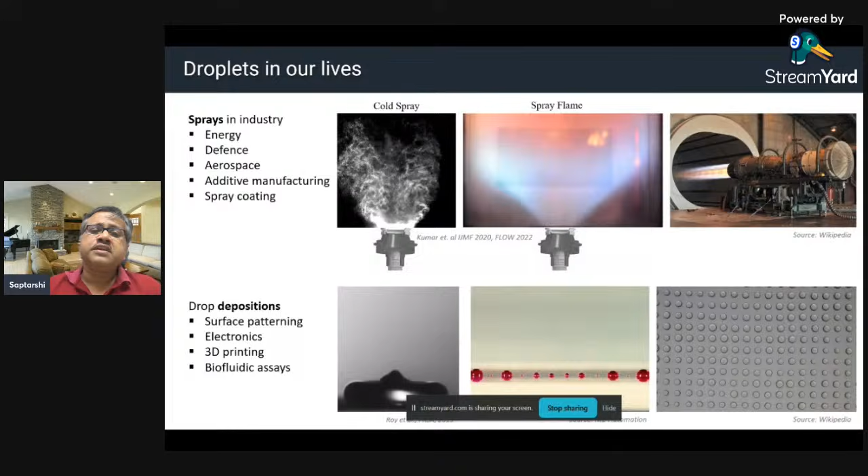But how about if you build those structures using a droplet-based framework? Surface depositions, 3D printing, biofluidic assays - these are all part of droplet depositions. And these happen at very small length scales, time scales, and small velocities also. So the top row basically designates sprays and droplets at extremely high velocities, whereas the lower part shows droplets where the flow is much more sedate. But both involve basically droplets. The physics does not change that much.

Moving on, you also have droplets in the framework which we call microfluidics. This is called droplet-based microfluidics. It has been there, and it is used regularly for point-of-care diagnostics. So microfluidics is a big area of research, and it is advancing every day.

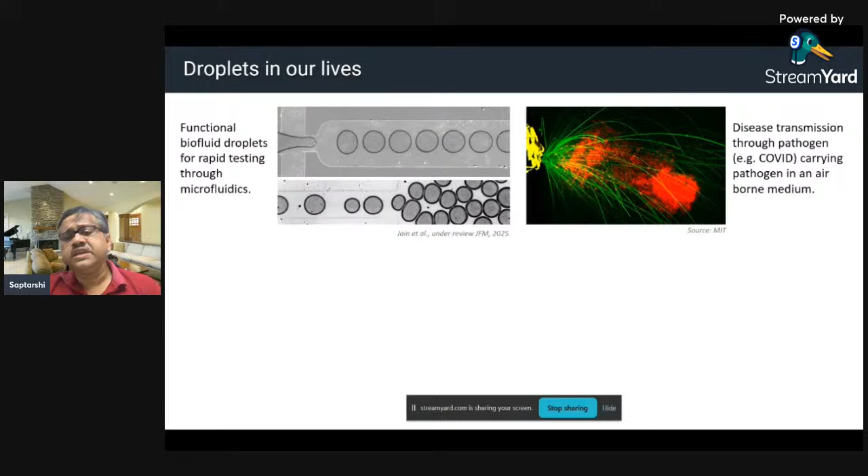So what you see on the right-hand side is an application of droplets which we have all encountered a couple of years ago during the COVID era, where disease transmission happened through droplets. When you coughed, sneezed, or talked, you generated droplets, and these droplets traveled in the air and infected persons located far away from you. So this is disease transmission. One example is COVID, but it can be any other disease transmission as well. Anything that is respiratory can actually happen in this particular fashion.

Then moving on, you also have droplets in agriculture, what we call precision agriculture these days. They also involve transport of droplets, basically droplets which can carry pesticides or nutrients. Droplets are transported by sprays or by vortex rings to transfer them to targeted plants. So droplets are there everywhere, and it's not just in one particular application domain, it's spread across multiple application domains.

All right, so now a little bit technical. Fluid dynamics is all about identification of the scales of the problem. Fluid dynamics is basically Newton's law. So it all depends on what are the velocity scales and the time scales of the problem. So there comes the interesting part. What you can see over here, the velocity scale increases from left to right.

At very low velocity scales and very low length scales, you have flows in microchannels. You have droplets which dry on surfaces. For example, the one on top, you can see bacterial flow in a microchannel, and the one at the bottom, you see a drying droplet of blood. These are at very low velocities of the order of microns per second, and the length scales are usually anywhere between 1 or 2 microns all the way up to hundreds of microns.

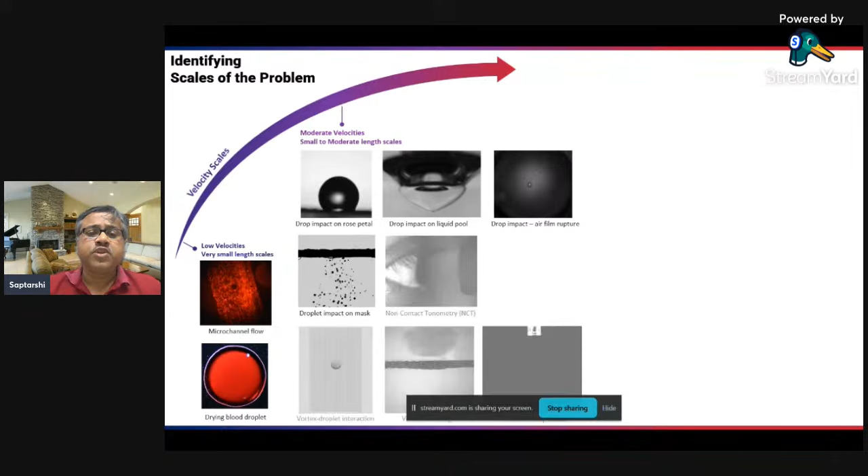In the middle, now if you go to moderate velocities and small to moderate length scales, you have droplets which impinge on surfaces - droplet impact scenarios, droplet impact on masks and wire meshes, droplets which come out of your eye, droplet vortex interaction, your soap bubble problem, and all these phenomena. These happen at moderate velocities and still small to moderate length scales. So these are right there in the middle.

And if you want to ask where droplet impact scenarios are used, you can readily see, for example, the windshield of your car. It is usually made out of a hydrophobic coating so that the droplet impinges on it and basically rolls off. But there are other applications where you actually might need the droplet to stick onto the surface. So surface engineering, surface chemistry, and droplet impingement play a significant role in all those applications.

The one that you see in the middle, where there is a human eye, this is what we call glaucoma testing. Many of us have done this, especially people who grow a little old and tend to develop increased eye pressure because of a condition called glaucoma. So what they do is use a vortex gun to shoot a vortex ring onto your eye and therefore measure the pressure in that particular way. In that process, you also generate droplets because of your tear film in the eye. So there are many applications and ways in which this kind of thing happens.

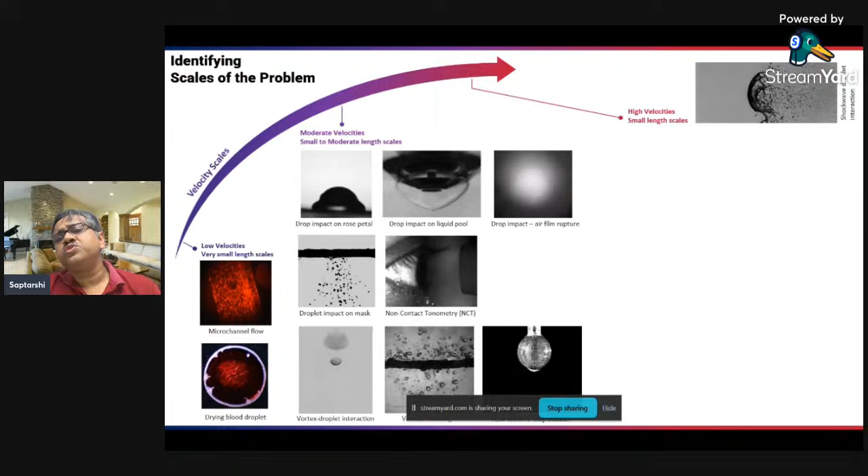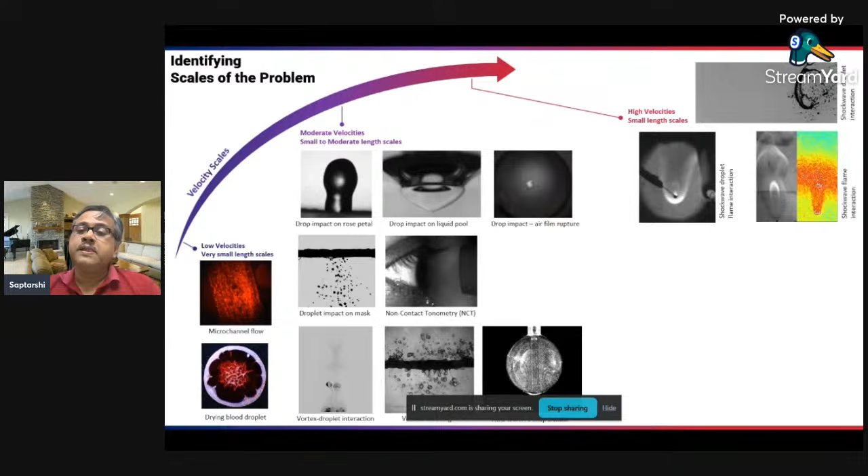Then you have droplets at high velocity scales. These are of Mach 3, which is typically close to 1,000 meters per second. But the droplets are extremely small, and we are going to talk a little bit about this in the later slides. So this is called high velocity, small length scales, usually called droplets under extreme conditions. For example, this is a droplet which encounters a shock wave. Then you have corresponding interactions happening in hypersonics, for example, where the flow is typically close to Mach 5, and therefore you have to understand how combustion of droplets takes place in those kinds of situations.

And lastly, there are high velocities and large length scale problems. This is typically what we encounter in gas turbines and other applications. The typical length scale for a gas turbine is of the order of 1 meter. In this slide, I showed velocity scales which vary from microns per second all the way up to thousands of meters per second, and length scales which vary from tens of microns all the way up to a meter. So you can understand the scale change that happens in these kinds of problems.

This is what makes analysis particularly difficult because of the scales of the problem. Fluid mechanics is all about scales of the problem and how these scales interact with each other. So I have divided my research all the way from small scale to large scale, from fundamental research all the way up to applied research. This slide tells you the different aspects of research. Anything dealing with multi-phase systems, interfacial sciences, we actually try to analyze those problems.

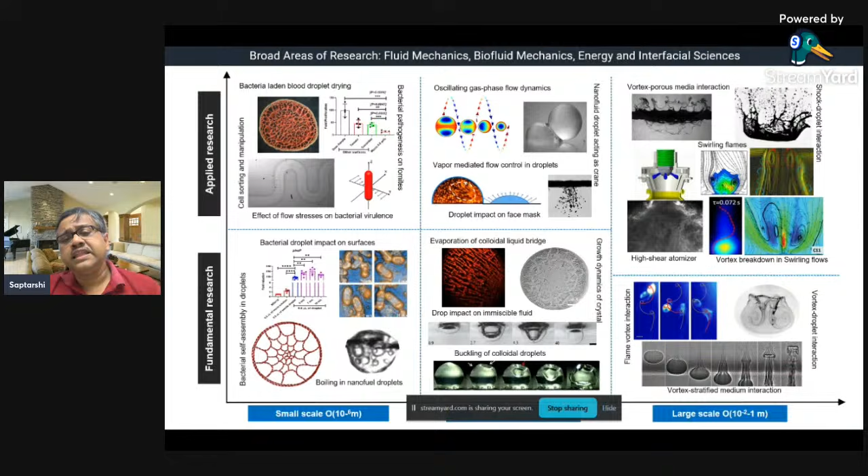So there are certain very interesting problems, some of which you will see in the next few slides. I'm a fan of Tintin, so what I can tell in this particular slide is that this is like the adventure of a droplet. So if I'm a droplet, what happens to me is my journey. I can deform, I can evaporate because I'm a liquid droplet, so I'm supposed to evaporate.

I can impact a surface. I can atomize, that means I can break up into smaller pieces. And in some cases, for reacting systems, I can also combust. So these are my different fates, my different destinations. It depends on the applications, but all applications will have one or more of these outcomes. So this is the journey of the droplet. My students tell me that we actually torture droplets, but since they cannot speak, we get away with it. So this is the adventures of a droplet.

And first we start with droplets in disease transmission. We look at a couple of specific areas which may be interesting to the audience, given that it is a broad audience. So disease transmission is something I'm going to discuss. There is a little bit of math and a little bit of experiments involved in this. More details can be found in the papers, which I'm pleased to share if anybody is interested.

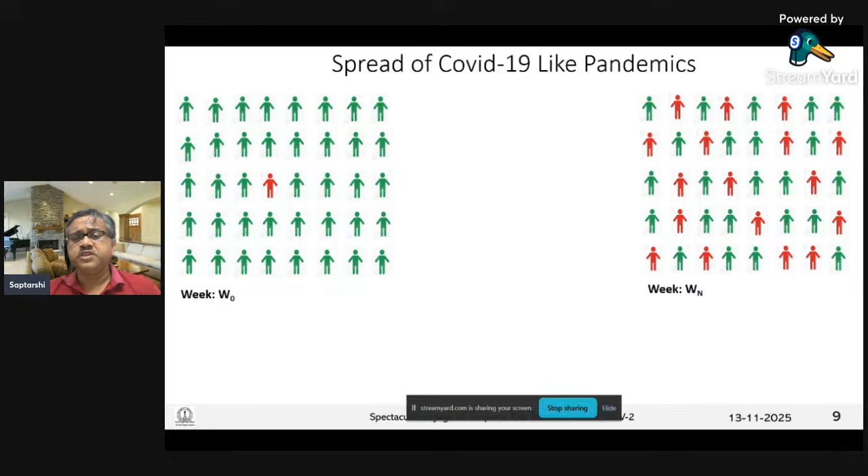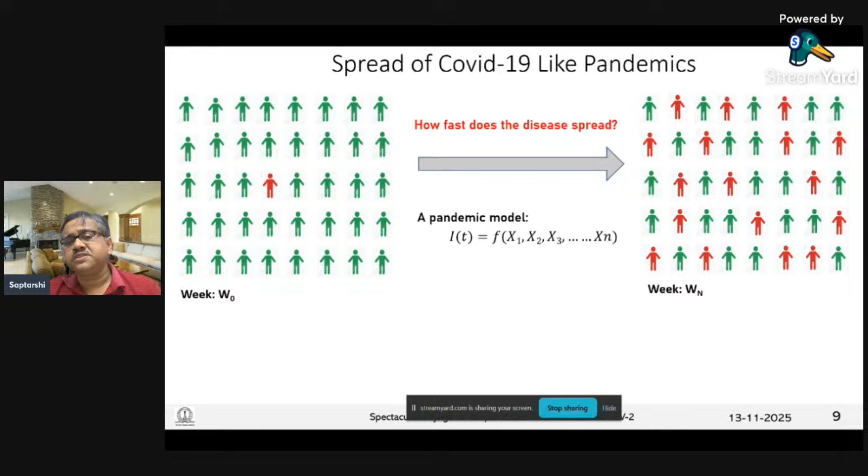So the question that all pandemic modelers and other people actually asked is how fast does the disease spread? This is a fundamental question, because that will enable us to decide how many hospital beds we need, what is the oxygen requirement, what kind of lockdown we should have, social distancing, and many other things. The idea is that any pandemic model basically tries to predict the rate of infection, and that typically should be a function of multiple parameters, x1, x2, x3, all the way up to xn. So typically pandemic models are complex, as you can understand, and they have a large uncertainty. That's why we did not predict COVID-19 that well.

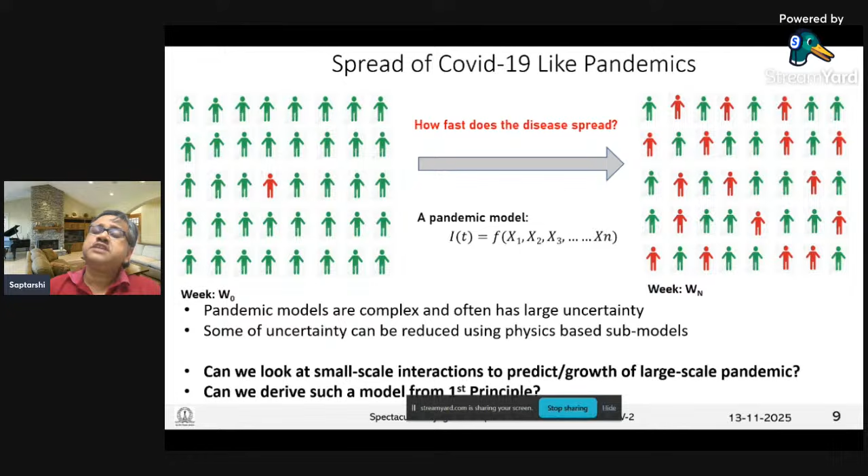Some of this uncertainty, we felt, can be reduced if we used certain physics-based submodels, so that not everything is based on curve fits. That led to the journey. We thought, can we look at small-scale interactions, the droplet-level physics, to predict the large-scale pandemic? There's a small scale where droplets are on the order of microns, and we want to predict a macro-scale event like a pandemic. Can we derive such a model from first principles and reduce the uncertainty as much as we can? This is more like a framework development.

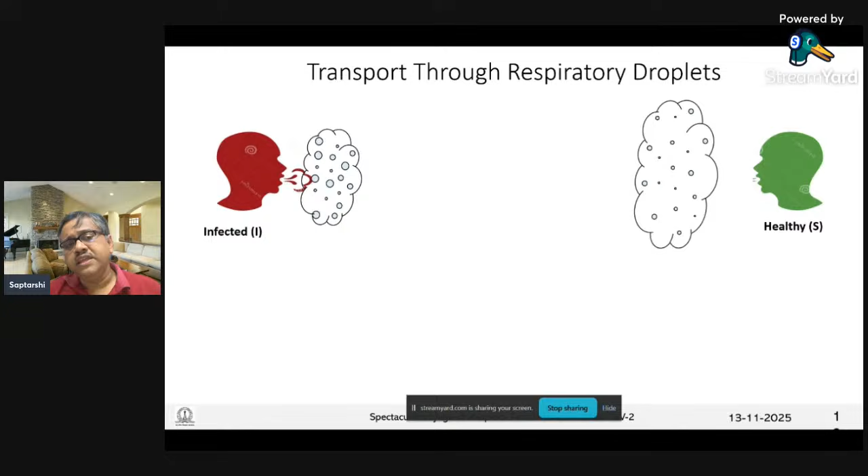So how does the transport happen? An infected person sneezes, coughs, talks, sings, whatever he does. He releases a cloud infested with droplets of various sizes. This cloud expands, because any cloud will expand, and a healthy person inhales this and becomes infected. This is the standard methodology.

When respiratory events eject these droplet clouds, it is influenced by various conditions. For example, if you wear a face mask, this cloud will be different. These clouds are then transported and at the same time dissipated, because fluid mechanics systems are highly dissipative in nature, so they are influenced by your ejection condition. Your cough cloud will be different than your sneeze cloud. It is also influenced by the ambient flow field where you are situated.

These droplets do not remain intact. They evaporate, precipitate, since these droplets typically have salt, and they aerosolize. If they aerosolize, precipitate, and evaporate, they will be influenced by ambient conditions like temperature and humidity. This matters a lot, because if you have a wet towel and want to dry it during the monsoon season, it will dry at a much slower rate compared to during summer or winter. So it depends a lot on temperature as well as relative humidity.

When a healthy subject inhales the droplet, it is not only the viral load he inhales, but also the biology of the virus, or in some cases other pathogens, and the immunity of the subject. Even though I might inhale a certain quantity of viral load, and somebody younger might inhale a similar quantity, the outcome may be very different. So it's a complex subject - it's not just transmission, it's how it affects the subject. It depends a lot on that.

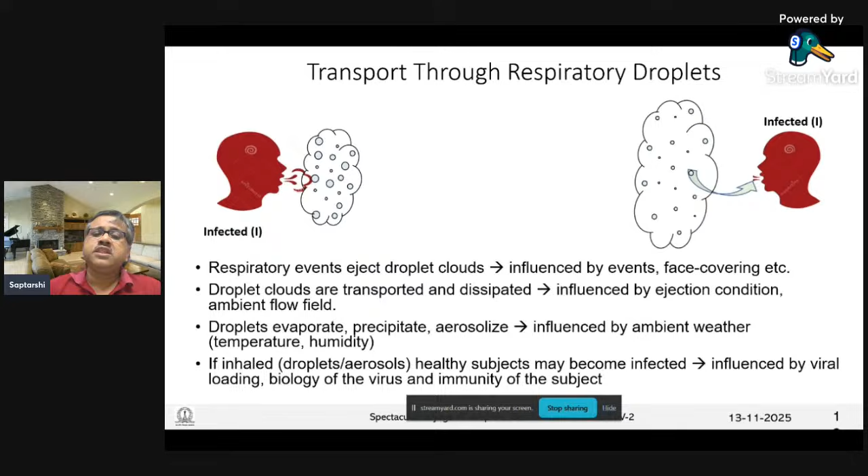The pandemic model - we'll come to this a little later. Coming from chemical engineering, mechanical engineering, and other backgrounds, you have a ready-made analogy: something like collision theory, as used regularly in combustion, where an infected person and a susceptible person give rise to two infected persons, and this reaction proceeds with a certain rate constant K. It's very similar to two molecules A and B colliding and forming a product AB. This forms the fundamental principle of the SIR model, and it can be derived from first principles.

If you look at a person P, he ejects a cloud of droplets. This cloud goes on increasing in size, and any healthy person, designated H, who comes into this domain of the cloud, within this ambit, will get infected. In other words, the rate constant at which the reaction proceeds, or the rate of infection, should be a function of the droplet physics. This is the basic tenet of what we are trying to do.

The droplet physics, in the case of pathogens, deals with respiratory droplets, which are essentially multi-component: they have mucus, water, salt, and the virus. They undergo evaporation, dispersion, and settling - the larger droplets will settle. Then there's evaporative cooling, because as droplets evaporate they can cool down. They also undergo crystallization, since they have salt. Their lifetime is a function of relative humidity and temperature. Now, these exhaled droplets suffer three fates.

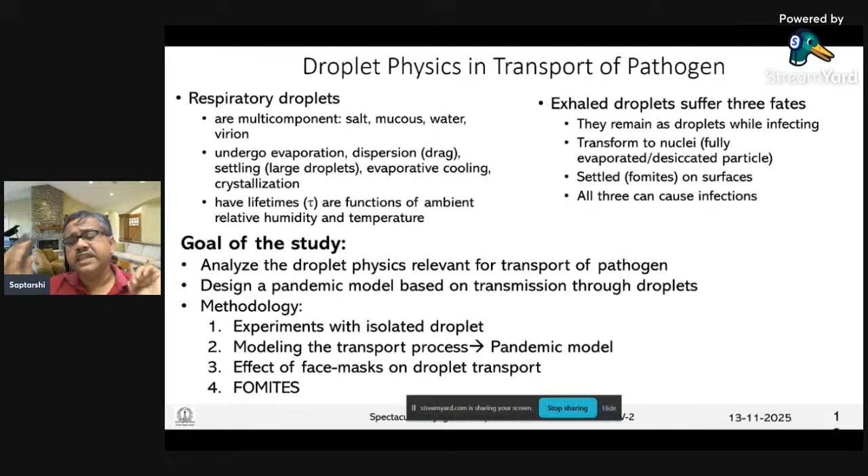So the goal of this study was to develop a methodology to do this. How do you do it? You first do some experiments with isolated droplets, then you model the transport process, and couple that model to a pandemic model. Then you look at other stuff like fomites, and what happens when you have face masks. We're going to take the first three. Fomites is a huge area of research where we've done significant work, but we'll cover that in a future session. So, experiments with isolated droplets - how do you do it?

The evaporation pattern is very important, as is the precipitation dynamics. So you basically simulate the respiratory fluid - typically you use 1% aqueous NaCl solution as a surrogate respiratory fluid. You also add nanoparticles, typically 100 nanometers in size, as a virus substitute. Otherwise you'd need a BSL-3 facility to carry out the research - that we have also done, but at a later stage. This is good enough to understand the physics of the problem.

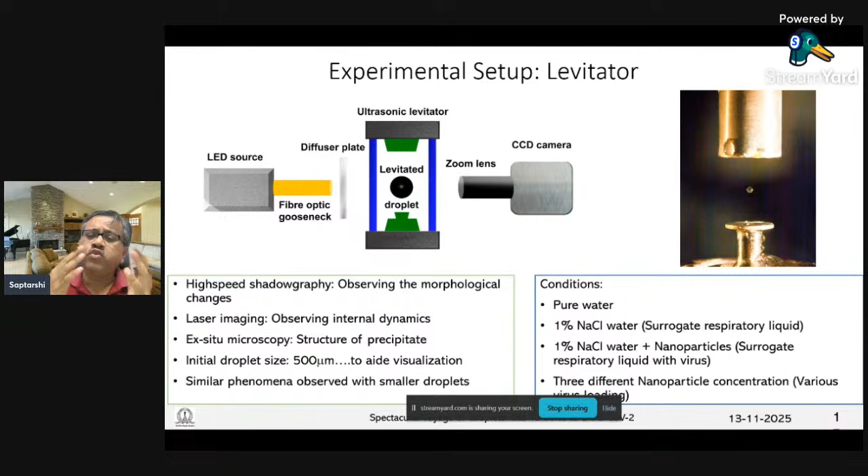So what we use is an acoustic levitator - a device where the droplet can be anchored in a contact-free environment using nothing but acoustic forces. We use high-speed shadowgraphy and laser imaging to see what's going on with the droplet size and the final precipitation morphology. We've done varieties of things: first a control case with pure water, then NaCl water, then NaCl water plus nanoparticles, just to see the effects of different components on the overall evaporation dynamics.

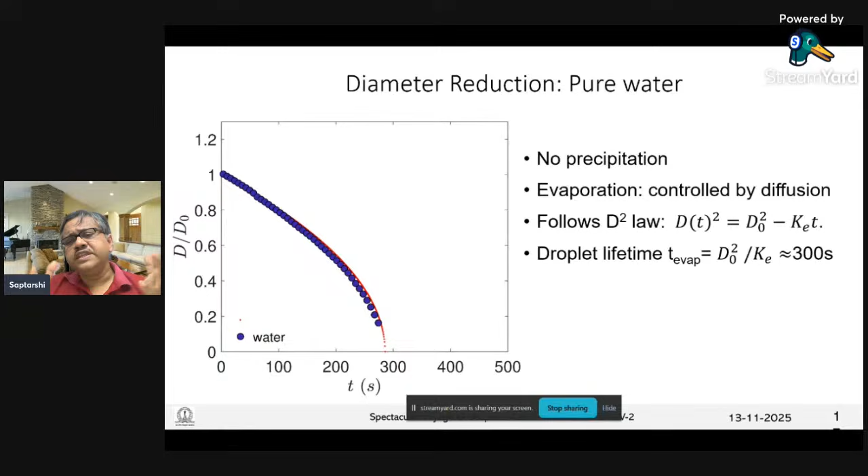If you do pure water, you get something like this - it follows what we call a d-squared law, which is a diffusion-dominated phenomena, and it roughly scales according to your droplet diameter. Then if you add salt water, the evaporation is a lot slower just because of the effect of the solute, governed by Raoult's law. As the salt concentration increases, the d by d-naught trajectory tends to develop a knee - the evaporation shallows down. It's a question of evaporation rate weakening.

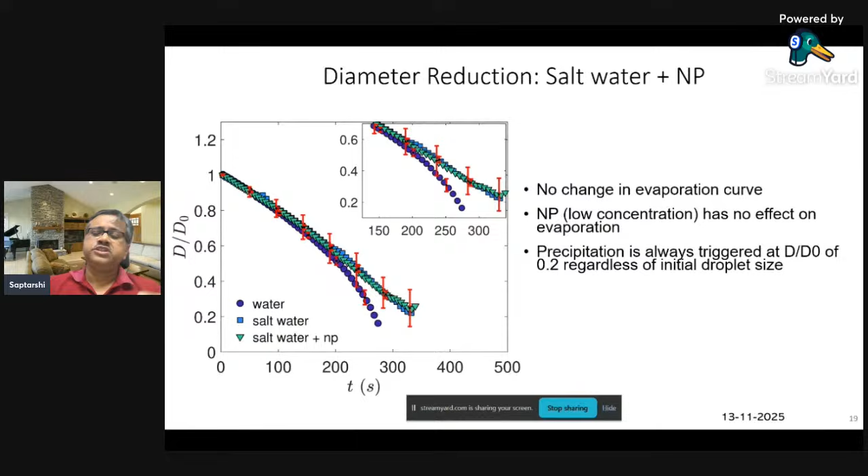But when you add nanoparticles for the kind of viral loadings we're dealing with, there's no change in the evaporation curve. The precipitation for the salt concentration we're dealing with triggers at around 0.2 of the initial droplet diameter - that's where you get the knee and the droplet doesn't shrink any further. This is at a typical temperature and relative humidity setting.

So this slide I will just skip.

So when you actually inhale an aerosol, you are basically inhaling a dose of this crystal, which is infested with these virions. But the virions are in a state of, basically, fossils.

But what happens when it goes into your mouth, it rehydrates itself and they come to life, if you consider the virus to be living in that way. So what we can say is that the presence of the salts affects the evaporation, and nanoparticles does not affect the evaporation, and the nanoparticles, aka the virus, distributes inside the crystals that form at the end of the evaporation process.

So these are the insights from the experiments. Now it sets the stage so that we can go for the modeling aspect of it. It has to be a physics-based model, validated by the experiments. It should capture the effect of the ambient conditions as well as the jets coming out of your mouth, but at the same time, it should be simple enough to use in large-scale pandemic models.

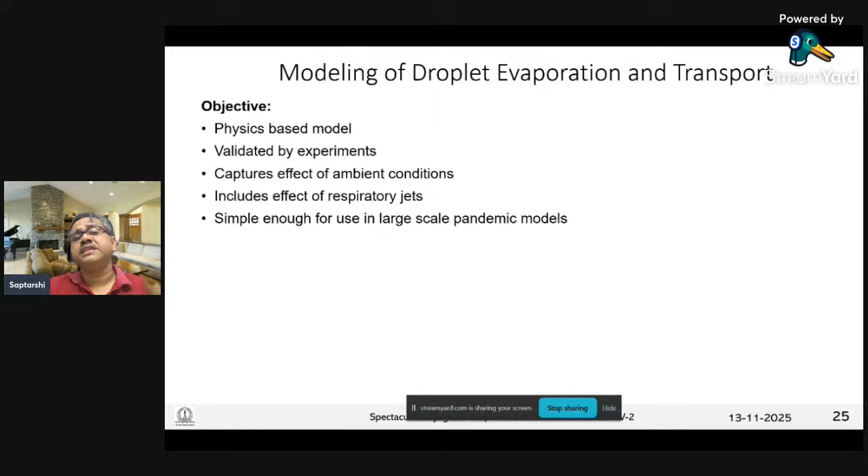We ourselves have done modeling of droplets, which are very complicated. You can solve for the entire field within the droplet, outside the droplet, etc. But to incorporate them in a large-scale pandemic model for a quick turnaround time is vitally important as well.

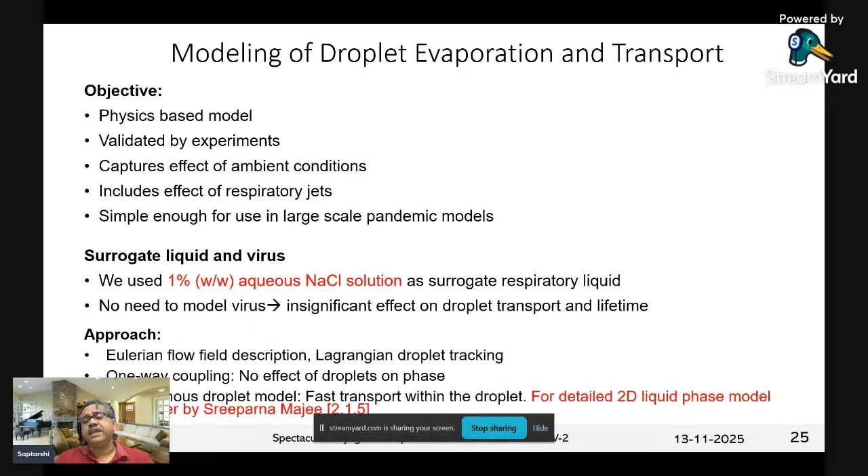So we capture the essential physics, but at the same time keep it light so it can run pretty quickly. We used the same NaCl solution. No need to model the virus because it doesn't have any effect on the transport and lifetime of the droplet. The approach is basically a Eulerian flow description with a Lagrangian droplet tracking, so one-way coupling. We have a homogeneous droplet model, as well as 2D models, 3D models, lots of things. I'm just going to show you the very basic model here.

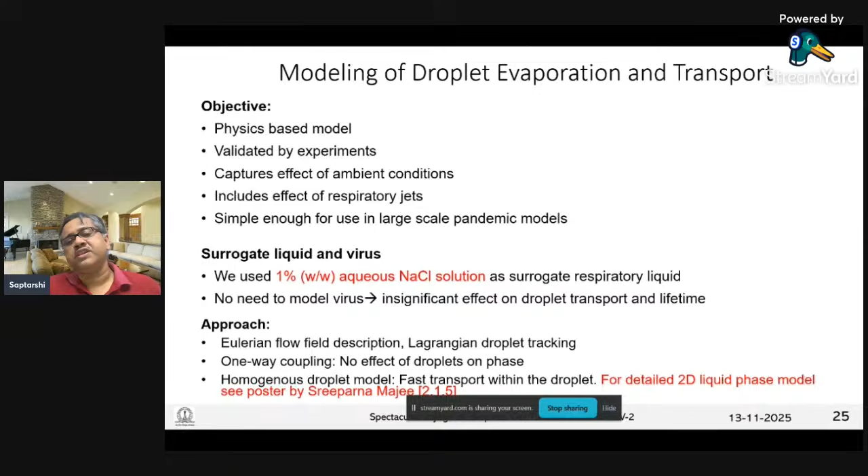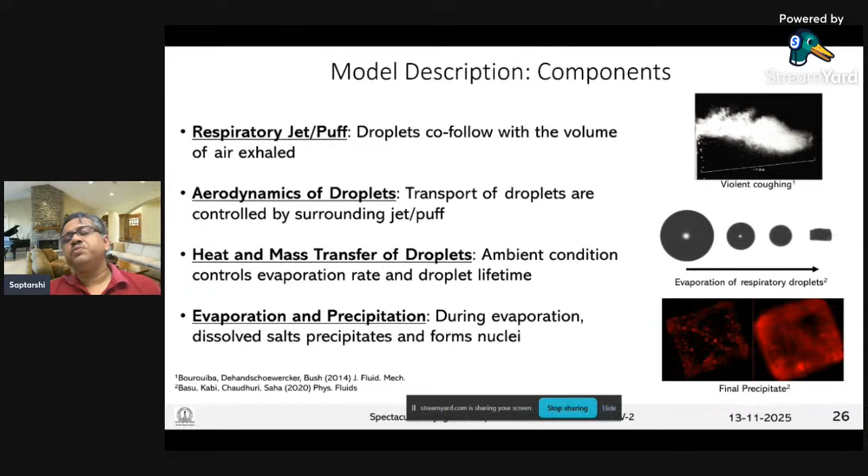So the model has four components to it. First is to model the respiratory jet and the puff that comes out of your mouth, and then the aerodynamics of the droplet, that's how these droplets get transmitted and how they're controlled by the jet and puff. And then, of course, the heat and mass transfer of the droplet, because these droplets shrink, as we saw. And then also trying to understand the precipitation physics, and doing all these things in a simplified fashion.

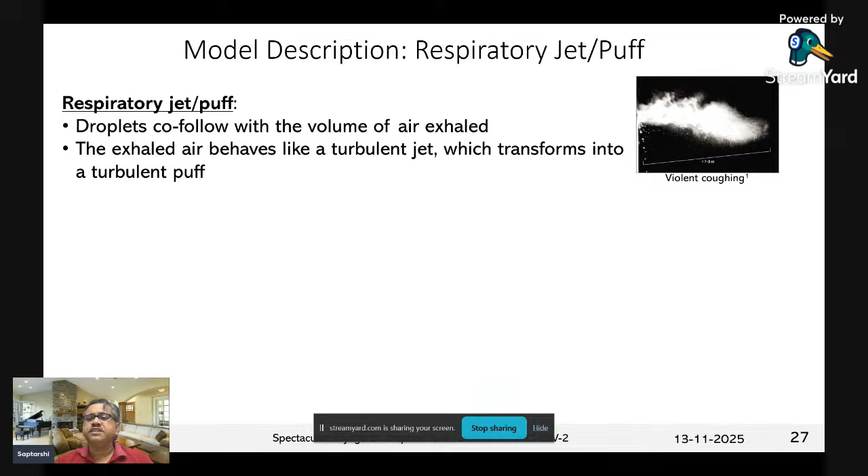All right, so this is the respiratory jet and puff. This is what comes out after a violent coughing incident. You can see the picture in the top right-hand corner. So when we cough, we first generate a jet, a turbulent jet.

But any jet actually requires a constant momentum source. We don't cough continuously, right? We stop. So as soon as we stop, the momentum source is cut and the jet actually transforms into a turbulent puff. We have modeled both aspects of it.

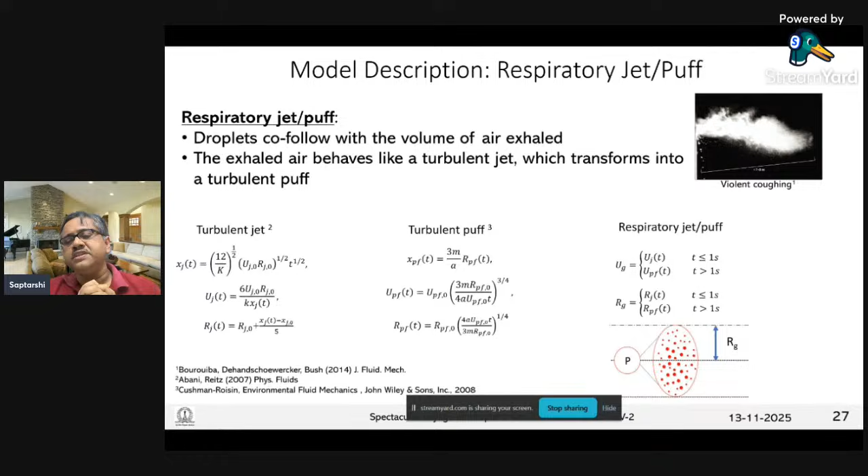You can see the equations, I'm not going to go into the details. This puff bed therefore shows an expansion, as you can see. R is basically the expansion of the puff, and it's how it scales with time, and here time also means distance. So how it actually expands with time and distance, that is what is shown over here.

Now, the aerodynamics of the droplet is rather simple. You have the droplet motion, which is basically the same as the motion of an aircraft or anything else you can think of. There is a coefficient of drag, and then there is a velocity, the relative velocity between the gas phase and the droplet phase. That is what governs the motion in the x direction.

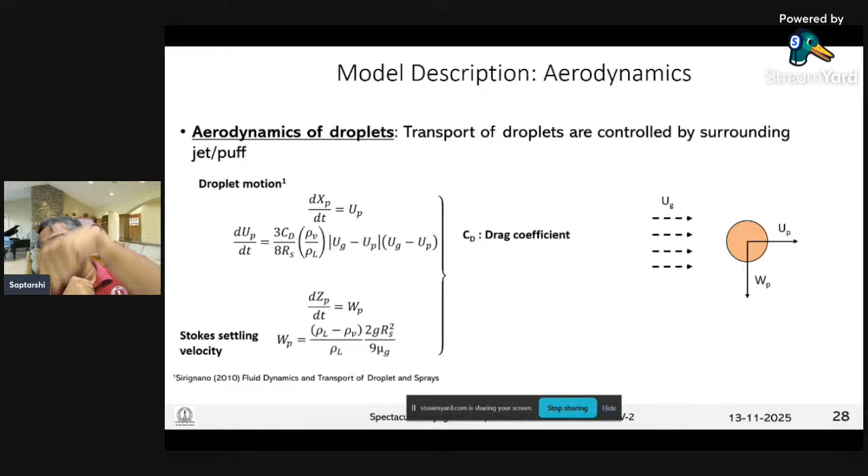But there is a z direction also, which is basically controlled by the Stokes settling velocity. So these droplets actually go in the x direction, which is the horizontal direction, and they also fall just because there is gravity. But smaller droplets can stay forever in the atmosphere.

Now, once these things are done, then you have this slightly complicated model where we actually model the evaporation, and then we model the droplet size reduction, then we model the crystallization, and we also do an energy balance of the droplet surface. All these things should give you the diameter reduction time, how much time the droplet takes to form the nuclei, how much distance it should actually travel, and what is the total diameter of the puff by the time the droplet is completely evaporated.

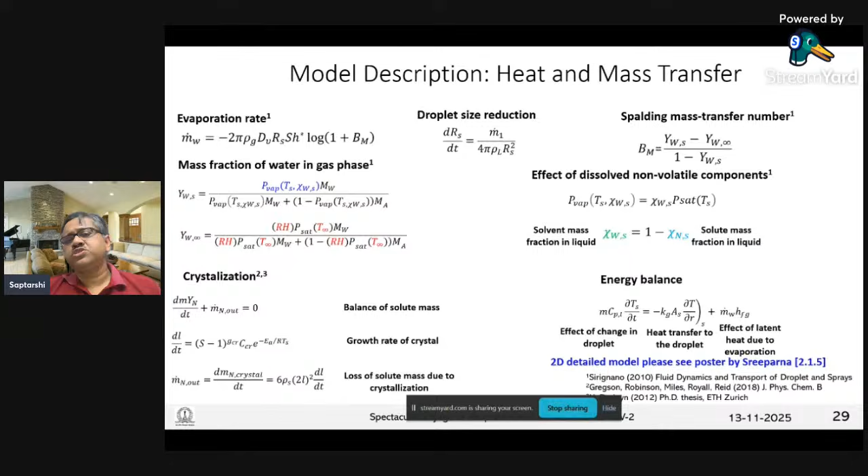All right, so forget about the technicalities of some of these terms like the Sherwood number and Spalding mass transfer number. You have to know a little bit of the evaporation and heat transfer aspects of it, but these can all be solved, and you can solve it on a desktop using a MATLAB code. So no problem there, you can easily do it.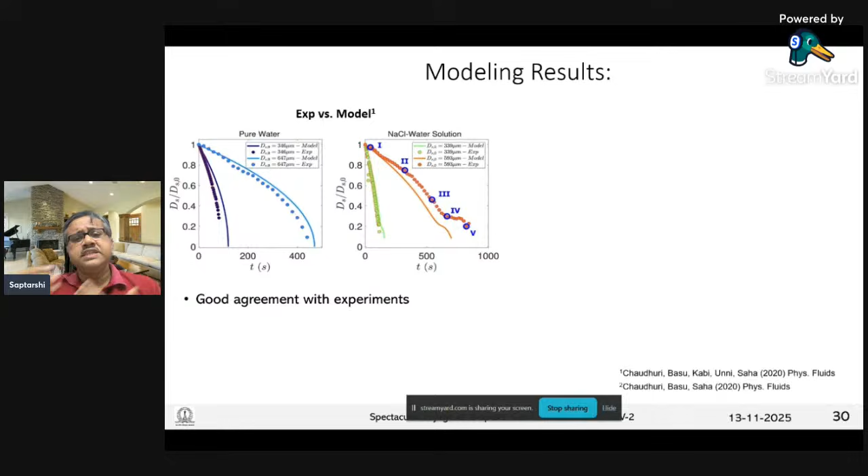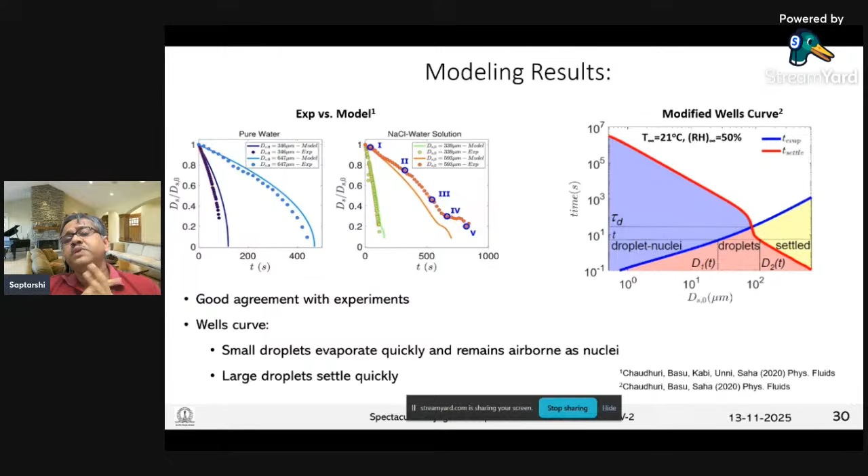So then we can reconstruct what we call a modified Wells curve. What we can say is that the small droplets evaporate quickly and remain airborne as nuclei before they settle to the ground. The larger droplets actually settle quickly, as soon as they come out of your mouth, around you. So the chances of infection grow when the droplets are small. This needs to be clearly understood: the small droplets are the ones which cause the havoc.

So A will say what is the kind of distance that the droplet travels before it becomes completely aerosolized. Now let us take point B, another location where the temperature is around 25, 27 degrees Celsius, typically like Bangalore weather, but the relative humidity is rather high, up to 80. In those cases, you can readily see that the distance the droplet travels is much more - the droplet lifetime is maximum for high humidity and low temperature.

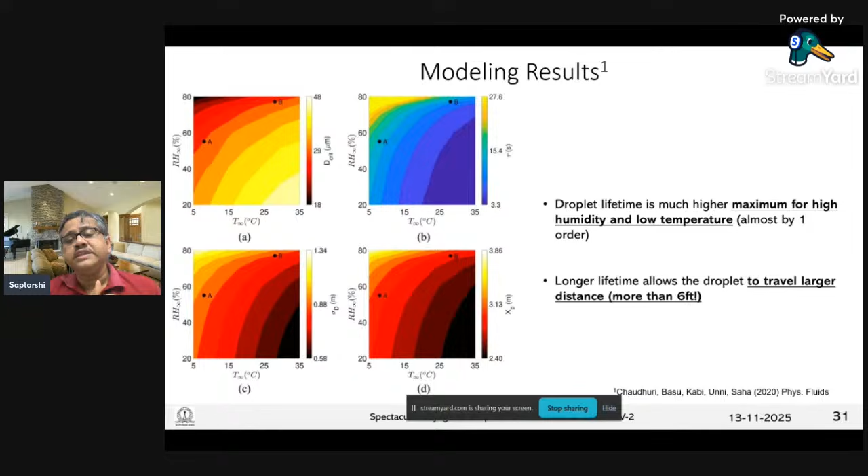This tells you that if you use modeling, you don't have to be arbitrary in your understanding of the situation. The droplet lifetime, shown in the plot just above, varies anywhere between 3 seconds all the way up to about 27 seconds - like one order change. So the understanding from the modeling was that cold and humid weather extend the droplet lifetime significantly, and respiratory droplets at certain weather conditions can travel more than 6 feet, and the droplet nuclei can survive and travel much more than the droplets themselves.

So now we come to the pandemic models. We understood the droplet physics, the lifetime and stuff like that. This is called the SEIRD model from collision theory, given as equations: susceptible interacts with the infected to form exposed and infected. The exposed becomes infected over a certain period of time, and the infected either recover or die.

The mortality rate was typically 3%, that's the ratio in the R3 equation. Your K1, the infection spread rate, has to be more than K3, the recovery rate, for the pandemic to grow. Some of these are taken from experimental findings and commonly associated knowledge. This alpha and beta you see - alpha can be the type of respiratory event, coughing, sneezing, breathing, etc., and beta can be the mode of transmission, like droplet nuclei, fomite, or whatever you want. So this is in principle what the model is all about, based on a droplet cloud that spreads, and anybody who comes into its ambit will get infected at a certain rate.

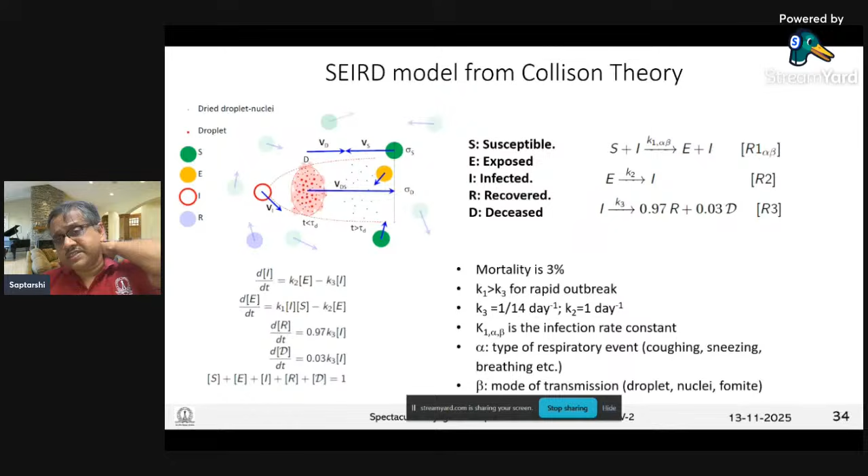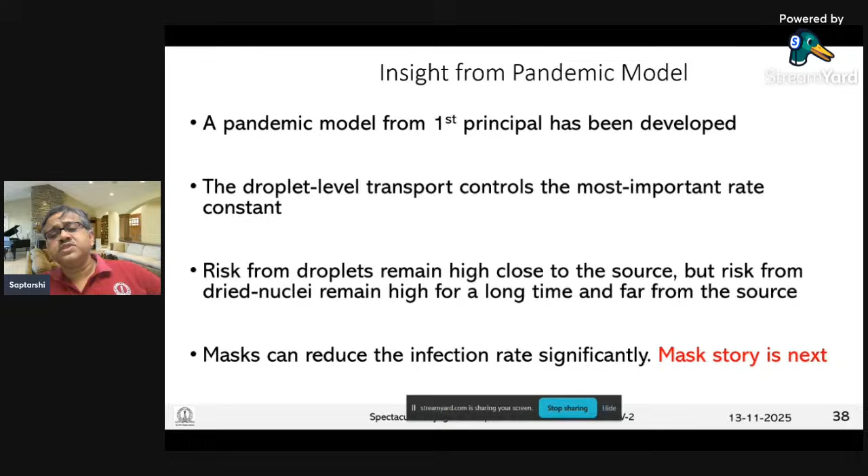But there's a bit of a twist in the story, which I'm going to narrate next. This is particularly true not just for India but for other countries too — America may have suffered for some other reason, but I'll give a generalized description of why masking can also be dangerous in certain ways if we don't do proper masking. But let's finish the pandemic model first: we've shown how it can be derived from first principles, and we've established a framework you can make as complicated as you want, and given some idea of how infection will propagate. The masks lower the infection rate, but there's a twist in the tail coming next. We all like twisty thrillers, and I'm no exception, so I'm going to narrate the mask story next — the story of face masks.

We all know that if you put on a mask, the jet does not happen, and it also absorbs some of the droplets. So the droplets do not go out, they stay within you, and as a result, you can flatten the curve, as they call it.

So this was the general notion of how masks can help the purpose and effectiveness of protection. But we wanted to look at something important: what happens to individual droplets when we actually have a sneezing or coughing event.

So what we did was clamp a mask, and then used a pulsed laser and a droplet dispenser, which used surrogate respiratory cough droplets, typically about 1% by weight of NaCl, about 0.3% gastric mucin, and certain other components. We varied the droplet sizes, especially the larger ones, anywhere between 250 microns all the way up to more than a millimeter. The typical experiments we'll show here are about 600 microns.

You let these droplets impinge on the mask at velocities of 2 to 10 meters per second. These are the typical velocities with which a cough droplet comes out of your mouth. In a sneezing event, this velocity is even higher. In fact, a sneezing event velocity can be as fast as a Shoaib Akhtar delivery, on the order of 150 to 160.

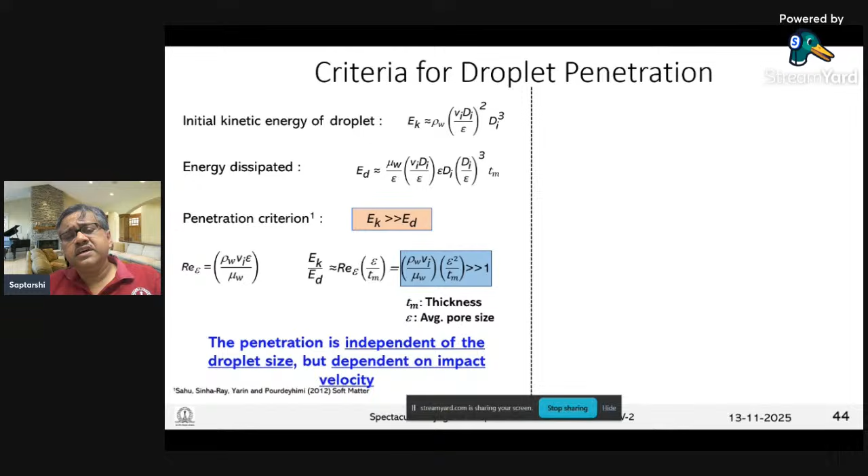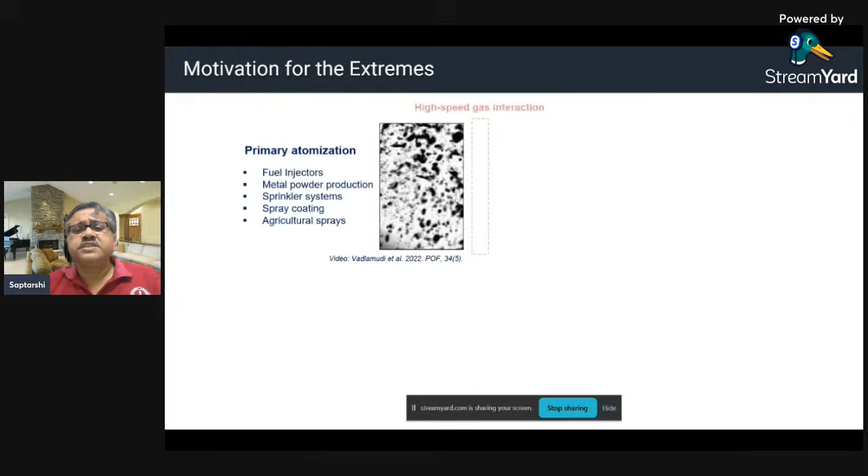And then you have this sheet atomization phenomena that I showed a little earlier. So the droplets atomize, and they atomize in a catastrophic fashion.

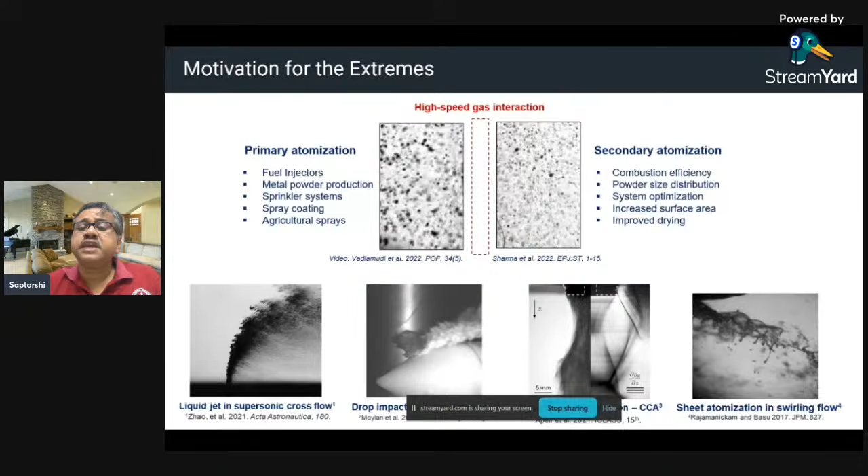So this is what happens: you have a primary atomization stage where you generate the first generation droplets, and then a secondary atomization stage where those droplets generate further daughter droplets, which refines the spray pattern. You ideally need the droplets to be small so that you enhance heat and mass transfer, combustion, or whatever it is you are trying to do.

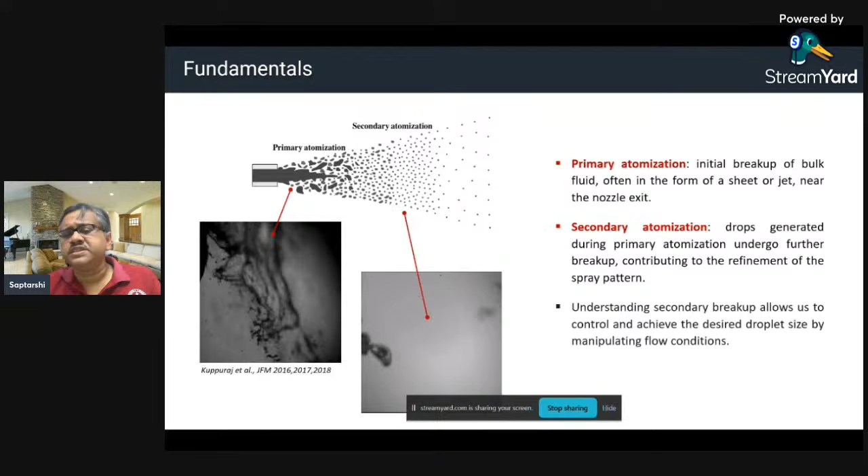So these are the basic fundamentals, and there are only a few forces to think of. You have the shear force, the pressure force, the body force, capillary effects, and the viscous force. As fluid dynamics guys, we go by our non-dimensional suite of numbers.

The Weber number is the inertial force divided by the surface tension force. Then there's the Ohnesorge number, which tells you how important the viscous force is. And then there's the standard Reynolds number, which is inertial versus viscous force. These are the three numbers people deal with all the time.

Now, when you isolate droplets, you get a very strange gamut of features. When the Weber number is low, meaning the inertial force is not very high, the droplets actually vibrate and break up. You can see these very nice vibration patterns.

A slightly higher Weber number gives you something called a bag, like a balloon. It just swells up like a balloon and then atomizes. Then you can have a balloon with a stamen. Then there's something called sheet thinning, and then something called catastrophic breakup.

Then you have the bag and stamen, and it atomizes. This is around Weber number of 44.

And then at a Weber number of 14,000, literally hell breaks loose, and you have something we call catastrophic breakup.

So people have been able to create what we call a regime map, showing how droplet breakup varies with Weber number and Ohnesorge number—basically viscous effect versus inertial effect. It can be shown that for a large range of viscosity, the viscosity doesn't really play any role; it's only the Weber number which dominates the show.

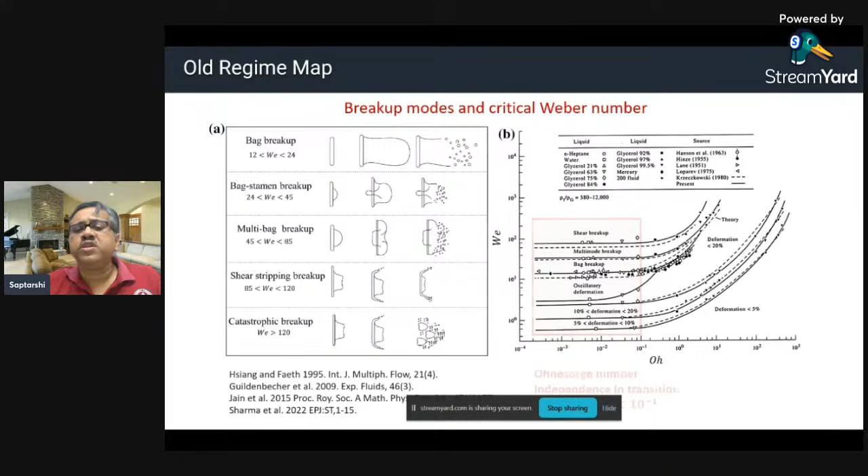And this is based mostly on bucketing the droplets in terms of the topology of the breakup. But this is actually not a good thing—it's only based on the topology, nothing else. It lacks physics-based intuition, and we sometimes call events 'catastrophic,' which is a vague interpretation of the matter.

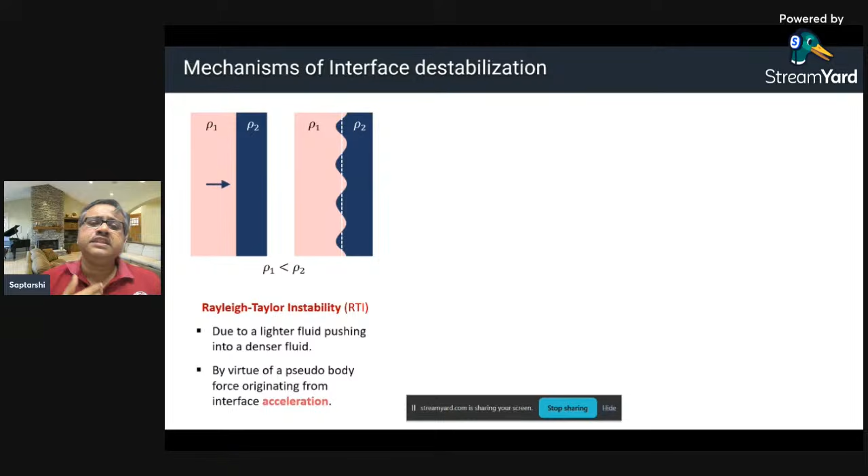So first we look at the mechanisms by which an interface actually destabilizes—one side can be liquid, one side can be gas. There's something called Rayleigh-Taylor instability, named after Lord Rayleigh and G.I. Taylor. When a lighter fluid pushes into a denser fluid, you get a pseudo body force originating from the interface acceleration. As a result, the interface starts to curl up and gets destabilized, leading to atomization, or it basically dissociates.

Then you have something called Kelvin-Helmholtz, which is basically due to shearing action. If two fluids move at a certain relative velocity with respect to each other, which shears against each other, you get the Kelvin-Helmholtz instability. You see this in the atmosphere too, at very small scale, and probably at astrophysical scales as well.

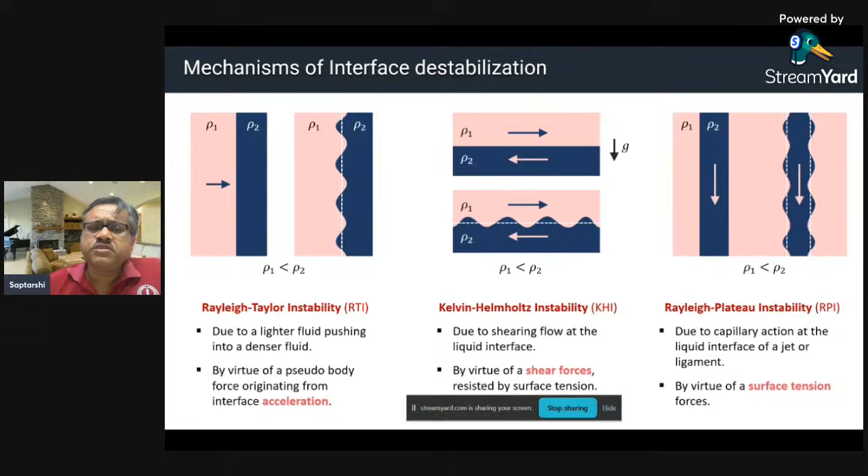And then lastly, you have the Rayleigh-Plateau instability, due to the capillary action of the interface. You see this in your kitchen sink—if you open your tap just a little bit, you'll get that filament coming out, and then it destabilizes after a certain distance and forms a ligament. So these are the three mechanisms by which an interface can get destabilized.

So what we found out is that for a droplet which experiences a very high speed flow, first there is deformation, just because there is a difference in pressure between the fore and the aft of the droplet. There is a wake region that tends to form on the other side of the droplet because of flow separation, and this droplet therefore deforms.

So the initial part, the first few breakup modes are basically Rayleigh-Taylor piercing. The last few breakup modes are called the shear-induced entrainment.

And not only that, though the Kelvin-Helmholtz wave actually prepares the ground by creating these undulations, the azimuthal Rayleigh-Taylor instabilities and the longitudinal Rayleigh-Taylor instabilities basically are superposed on this Kelvin-Helmholtz. So basically you have a combination which is shear-induced entrainment, but there is also an effect of Rayleigh-Taylor piercing as well. So it's a complicated breakup mode that we talk about.

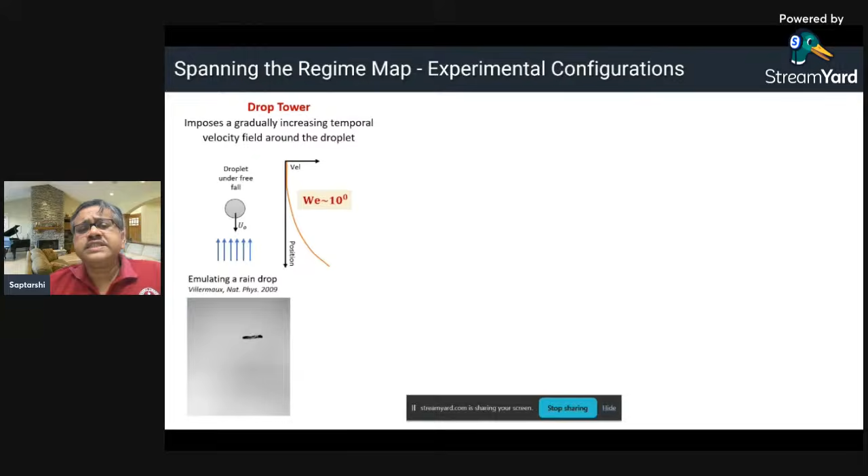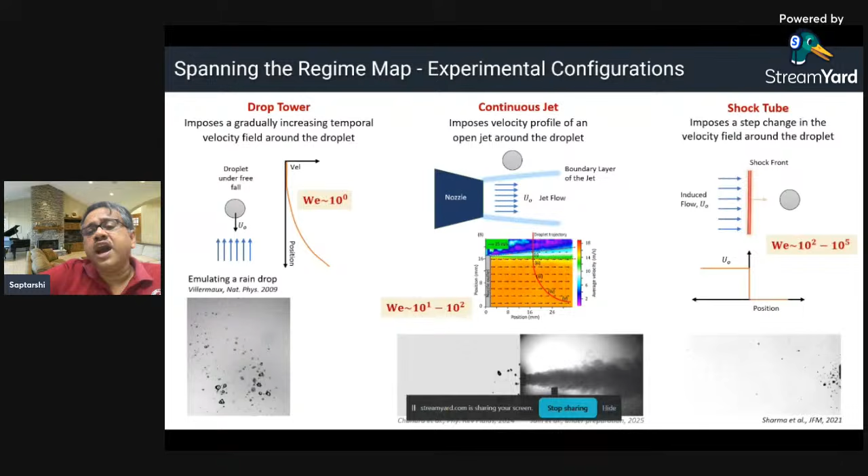So how do you do this kind of experiments? You can actually do it in varieties of ways, but since the time is short, I'm going to show only the shock tube part of it, because shock tube is what actually guarantees you to generate very high Weber number, very high flow. You can do it in a continuous jet, you can do it in a drop tower, many things are possible. We have done it across all kinds of states, but shock tube is the one that generates the most impact.

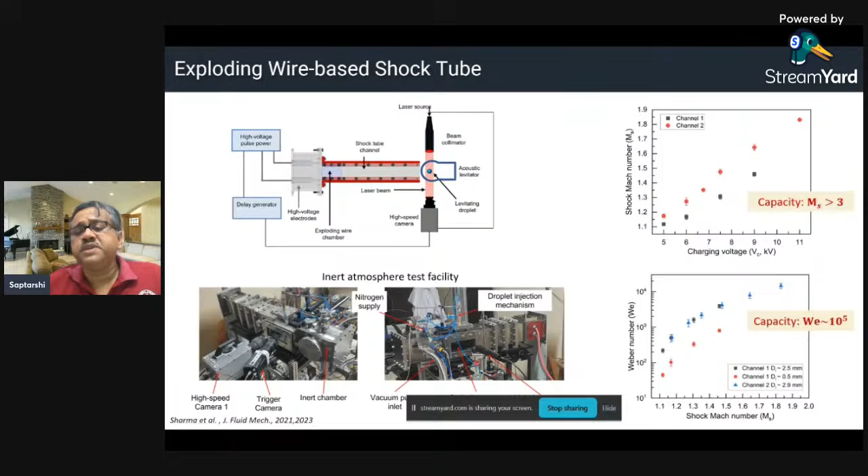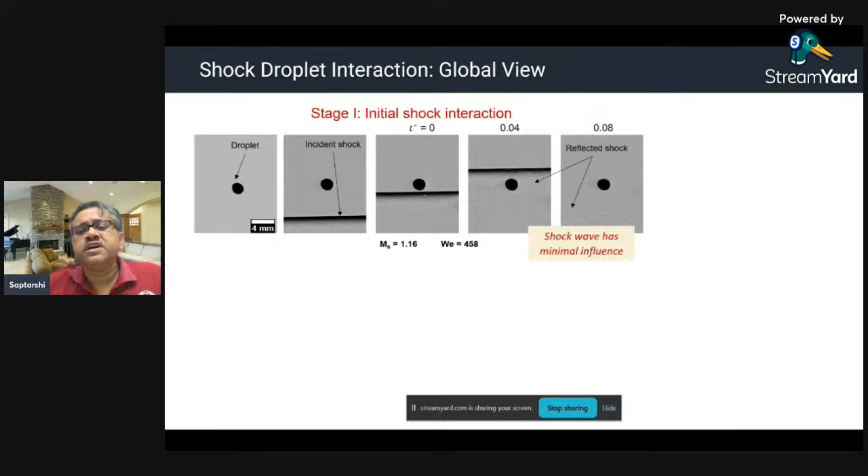So this is what happens when the droplet actually encounters the shock. Well, it does not show anything at first—it just shows the reflected shock and stuff like that. But what actually happens is that the flow that is entrained or induced by the shock, which is called the compressible vortex ring, that is what interacts with the droplet and causes havoc.

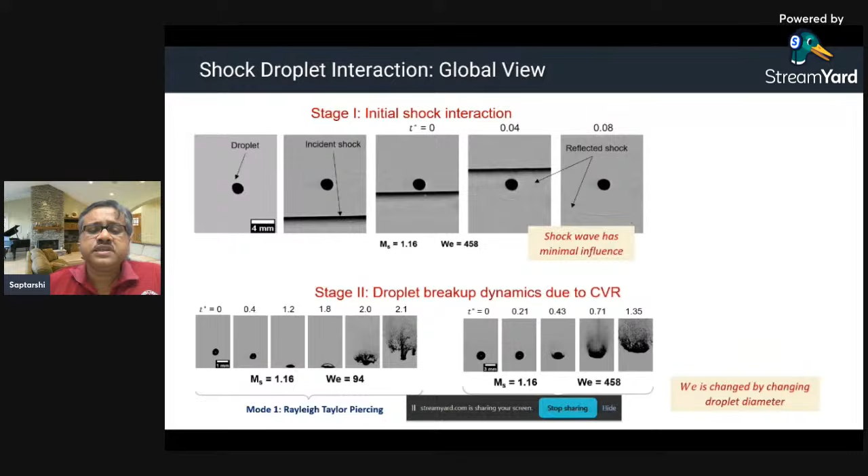And this is what happens: for low Weber number, you will get the Rayleigh-Taylor piercing, and for high Weber number, you are going to get this shear-induced entrainment. So this is how it looks like. You can take a look at different Weber numbers, how they look like, how the liquid sheet actually gets stripped, and stuff like that.

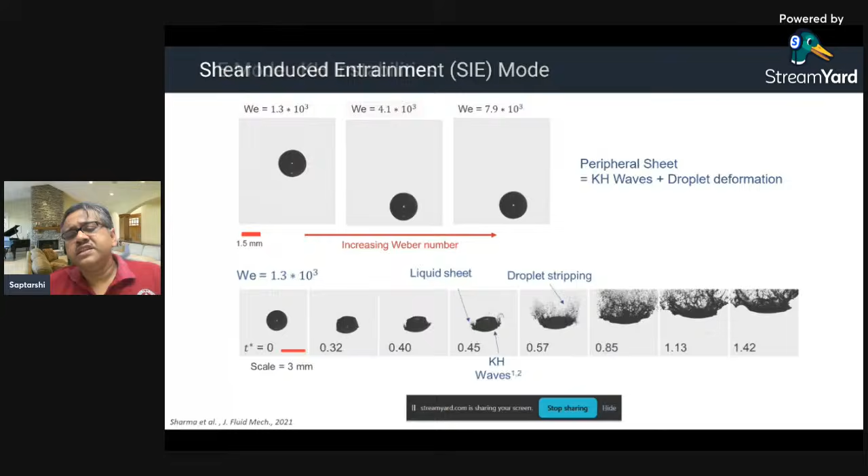So this is called KH instabilities. If you do linear stability analysis of this, and if you try to model this, you can check whether you can predict the correct wavelength—the most dangerous wavelength, or the fastest growing wave number, whatever you call it. So this happens because there is a slip at the interface. I mean, normally people do that.

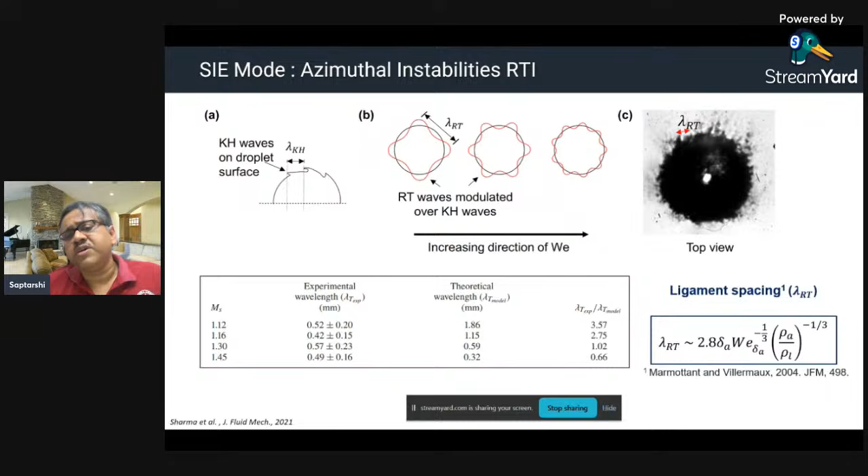There is a slip at the interface, but that is unphysical, so it does not give a good prediction. But if you take into account the boundary layer, the vorticity layer thickness over which the flow actually gets modulated, then you get a pretty good match with the experimental, numerical, and theoretical data. You can do the same for Rayleigh-Taylor waves, and you also get a good match between experimental and theoretical models. So these predictions match in an order of magnitude sense.

I'll skip some technical details and move to something more interesting: you can show that all droplets actually break up in a similar fashion. We've shown this with data for Newtonian liquids, and now we can go to polymeric liquids.

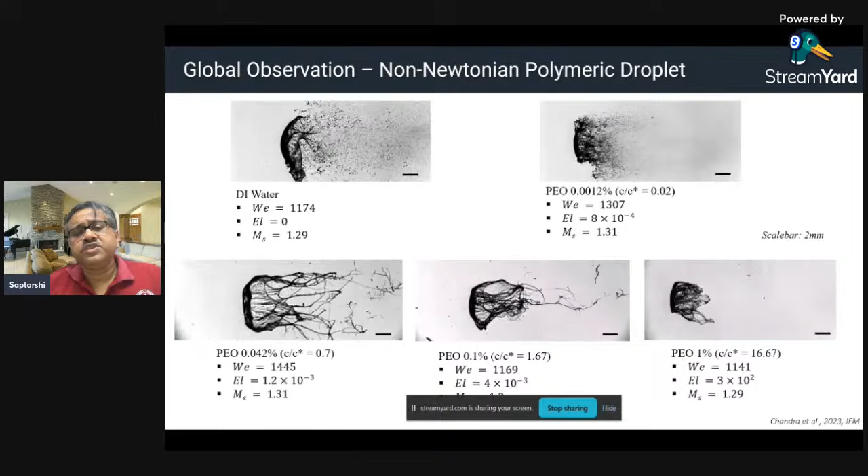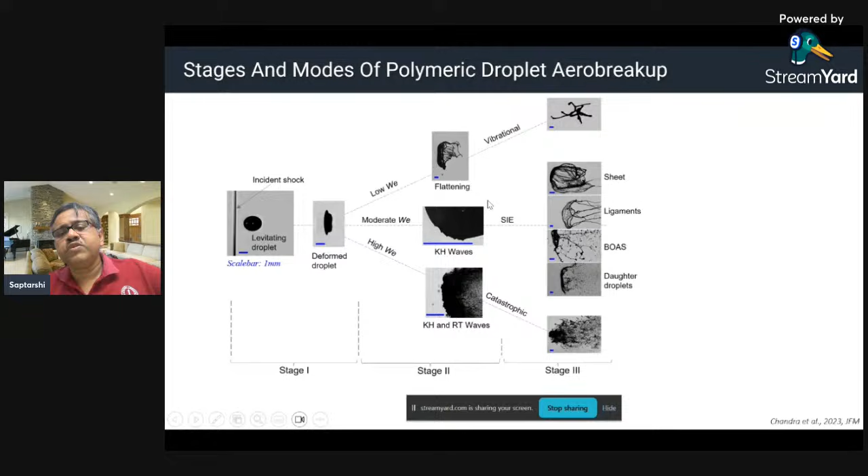That's the most important part: whatever the concentration of the polymer, the way the instabilities develop is basically the same. What we did is get a temporal map showing that in stage 1, from left to right, a droplet first deforms, then forms KH waves or KH and RT waves, or undergoes a vibrational or Rayleigh-Taylor kind of mode. At stage 3, it forms all kinds of structures depending on the liquid. So the first two stages are universal, while the last stage, the final topology, differs for different fluids, though the instability mechanisms are still the same.

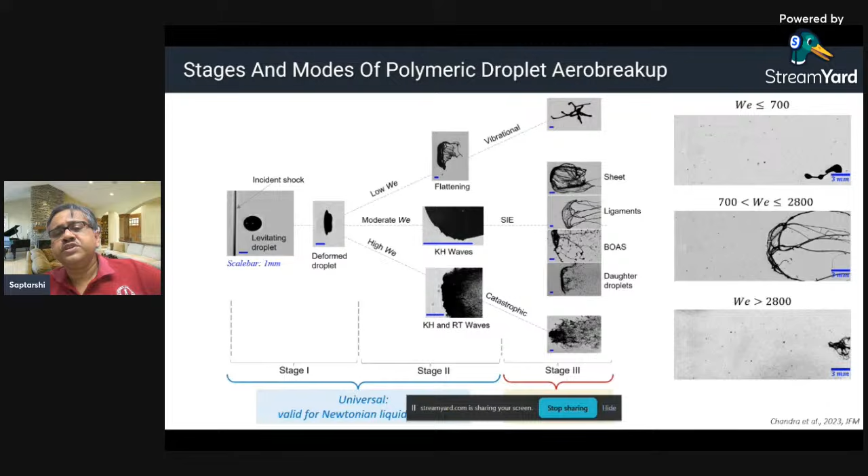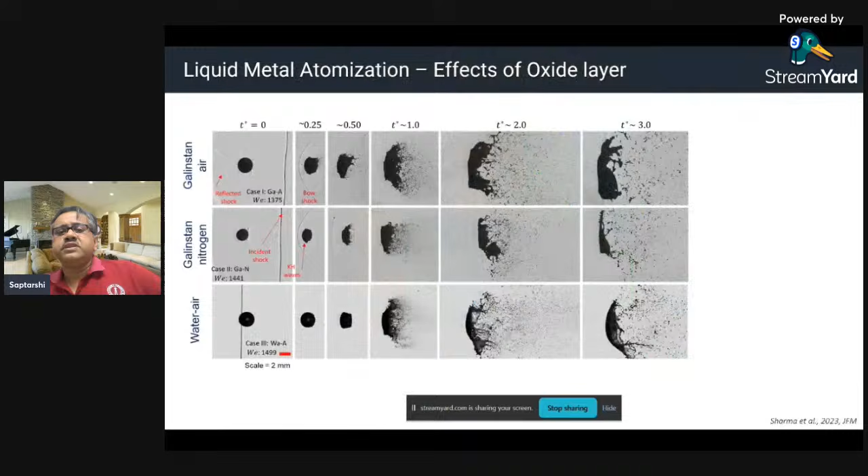You can put all these things into a temporal regime map, showing how the droplet proceeds from one stage to the other, what pathway it takes, and how it ends at the final state. The fact that the first two stages are the same across any type of fluid shows that this is a universal framework. This is also liquid metal atomization that we have, so this is the story in a nutshell.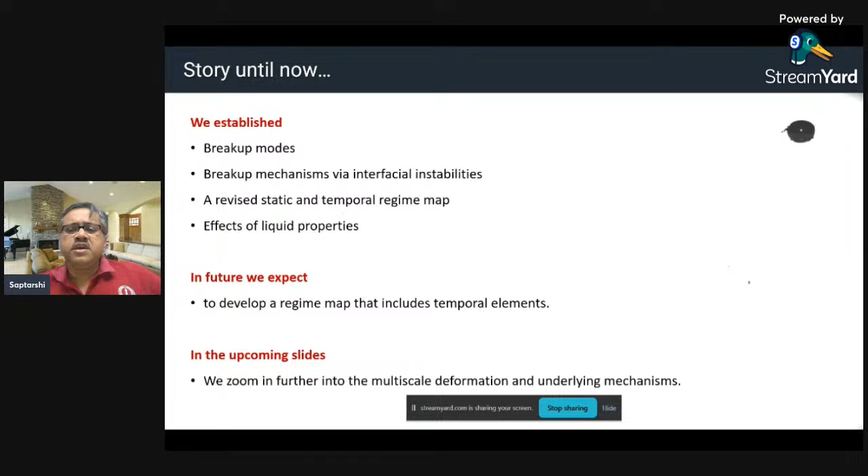In the next maybe 5 minutes before I end this talk, we'll look at something even more interesting: the multi-scale physics of the problem, meaning how the evolution mechanism actually works. If you look at something like catastrophic breakup, it's messy. You see nothing but a mist and a cloud of droplets.

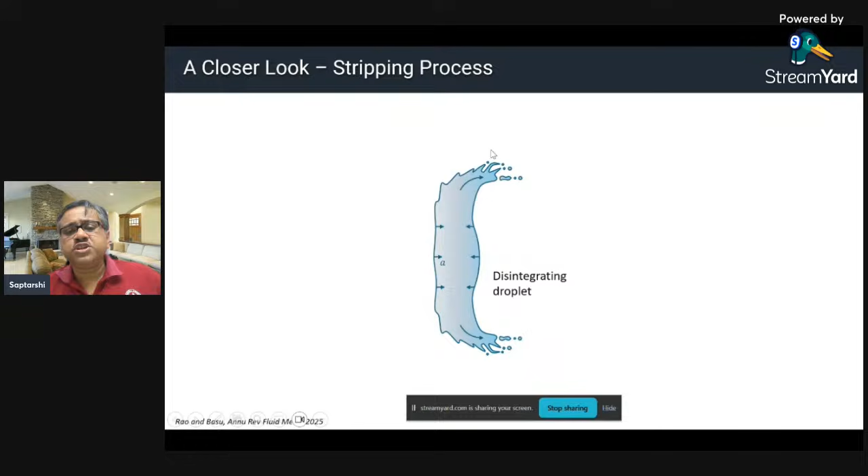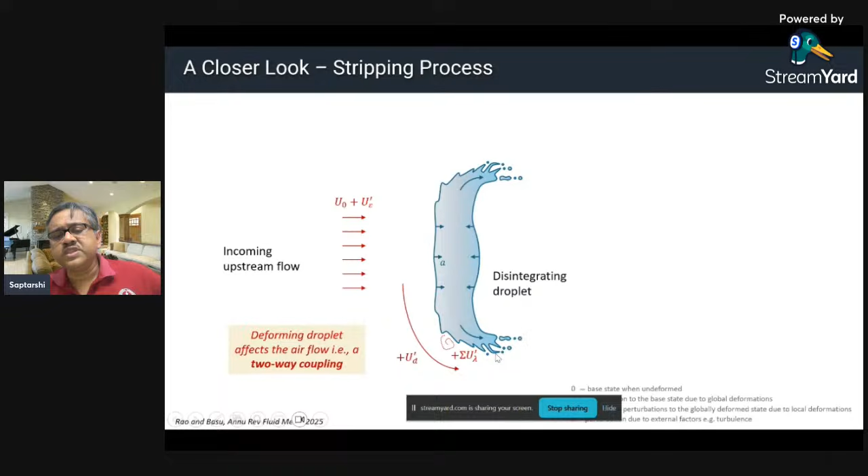But if you look at the stripping mechanism in detail, this is a droplet which initially deforms like this, and there's an incoming flow with a velocity, plus an oscillating component. When the droplet has deformed and the first round of wavelengths have formed around it, this starts to modulate the incoming flow. In other words, the deforming droplet modulates the airflow by forming small vortices along the crest, like small hills forming on a curved interface. This is a typical two-way coupling.

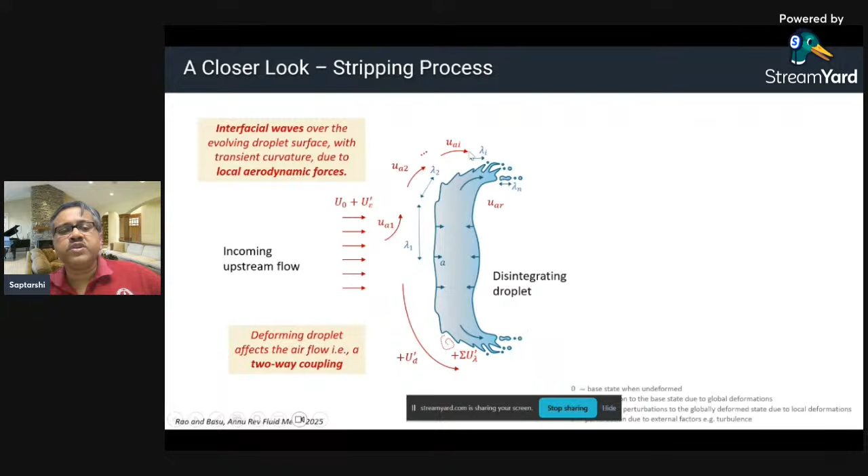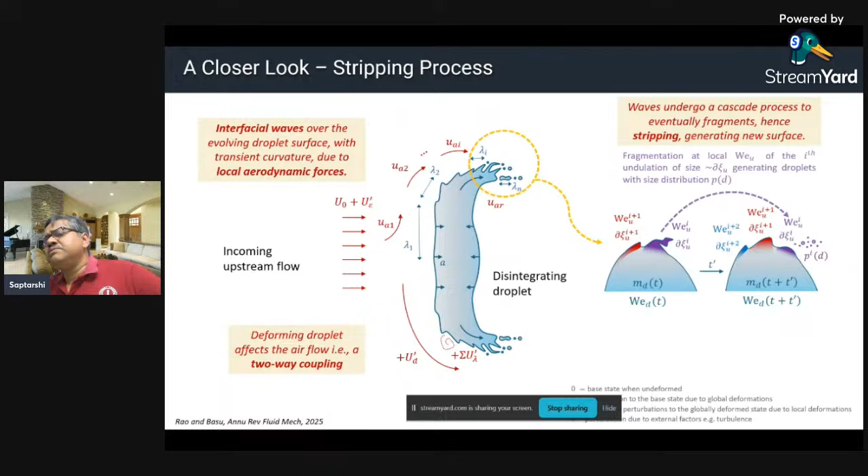Now these interfacial waves start to modulate the local aerodynamic forces. If you take a small portion out of it, you'll see there's a local Weber number and a local deformation length scale, and the droplet atomizes, exposing a fresh surface to the same kind of disturbance. As a result, it's the local physics that controls this breakup. So the waves, in fluid dynamics terms, undergo a cascade which eventually fragments and generates new surfaces, and this process goes on and on. That's how this stage happens.

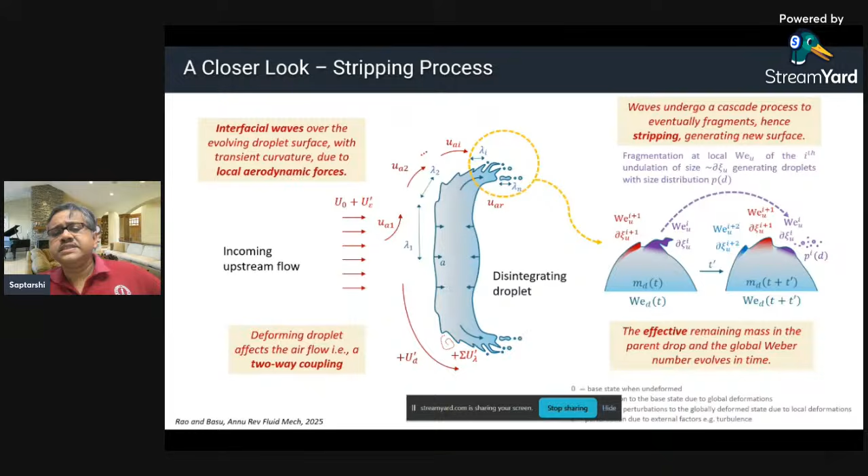You can take an even closer look at this. You can see this is a droplet, and initially there's a wake around it. The droplet deforms, the wake becomes enlarged, and it becomes even more enlarged, starting to form the first generation droplets.

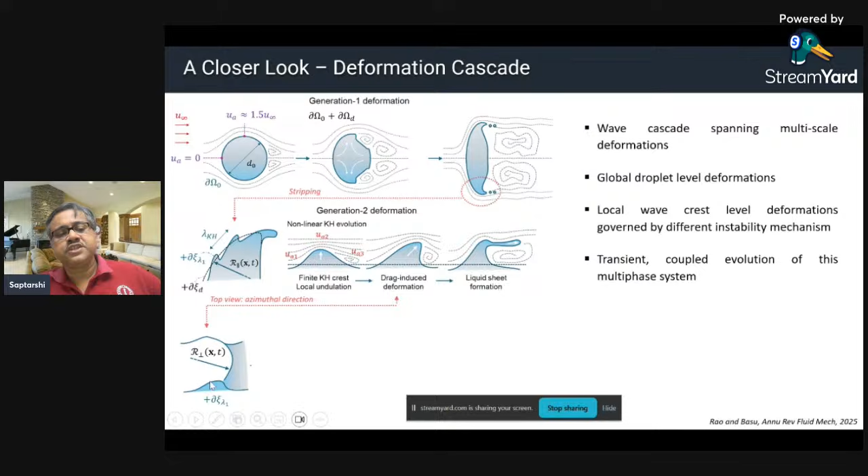Now, if we take a look at this portion here, it is curved, and you can see that locally the speed is changed. As a result, the sheet gets stretched in the azimuthal direction. And because the sheet is getting stretched, if you look at it from the top view, this actually leads to what we call Rayleigh-Taylor waves.

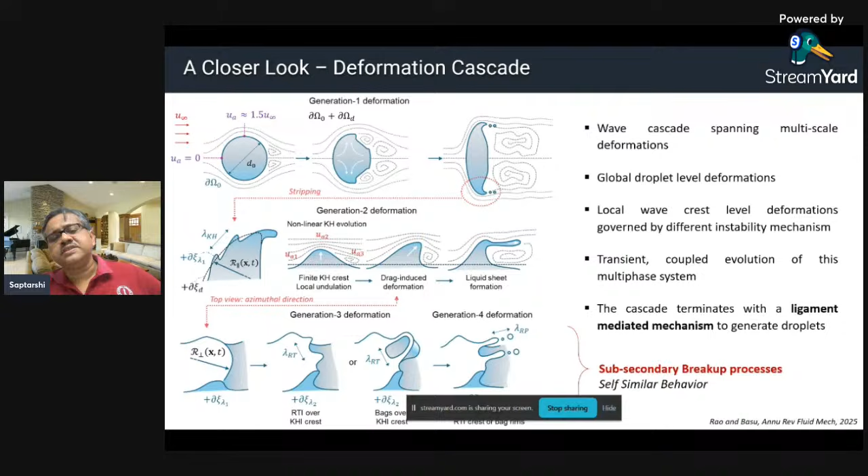And then it forms these local bags. So these bags are not global bags, these are local bags, and it generates droplets at the end. So this is what we call a ligament-mediated mechanism transfer, what we call the subsecondary breakup processes. And it actually has a self-similar behavior.

Okay, so this is what happens, and I will show a couple of images to prove the point, what happens in the case of droplets like this. So you can see actually how these bags actually form. All right, so this is always a ligament mediated cascade at the end of the day.

So this is what you see, these are like small bags, what you can see over here. Remember, this is the scale. So the droplet scale is, say, 0.5 mil. But these scales that you see around in the zoomed in views are very, very small, and they locally form these bags and rims and stuff like that.

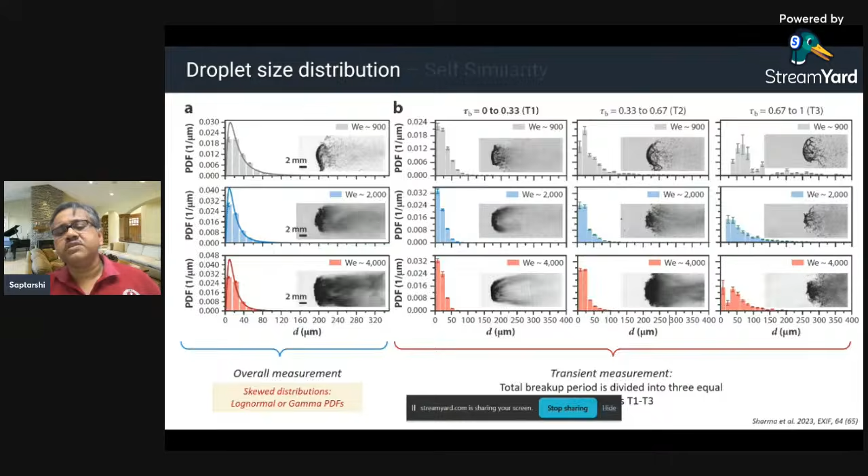Okay, so this leads to what we call a ligament mediated droplet generation. And to cut a very long story short, there are new optical techniques that we also found, but let's not bother about that particular story. We can actually show that the droplet size distribution shows a self-similarity if you do this calculation properly.

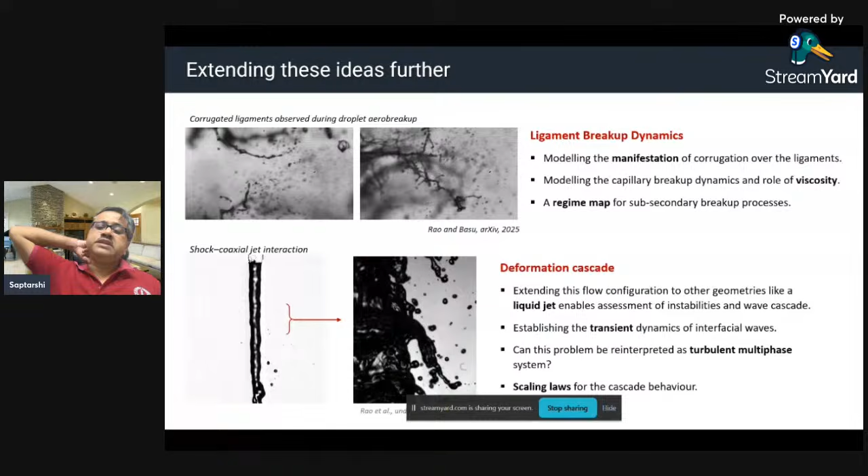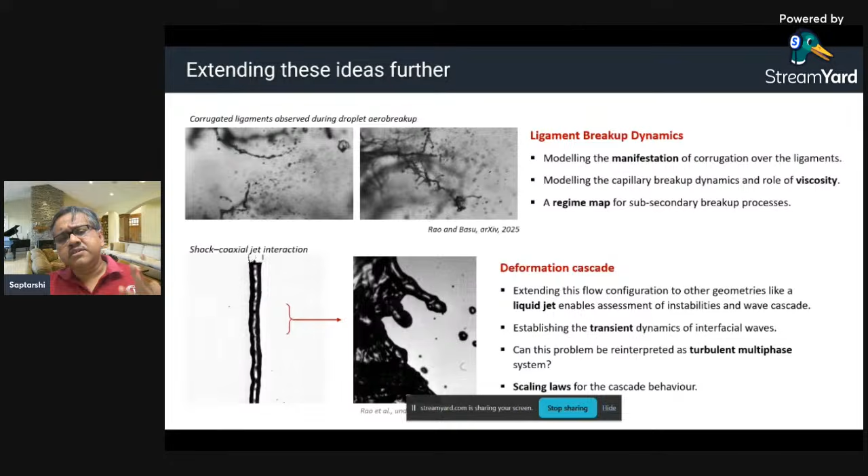All right, and to go next, you can explore these ideas further. The next thing we are trying to do is develop turbulent multi-phase system scaling laws. For turbulent flows, we have certain scaling laws, as we all know, but can we do that for the droplet, for this cascade behavior, and try to understand the turbulence mediated energy transfer to the droplet level and vice versa. That is a task for the future and ongoing work, and also to work with other types of complex fluids.

So that we can understand more about the breakup dynamics. There are lots of things, I will stop kind about here, because there is also a story on evaporation and self-assembly of droplets, which we are not going to go into, because that is a story, this is a very long session, it will become otherwise. So I will stop the talk now, and anybody who is interested in asking any question, I will leave it up to them to come on and ask.